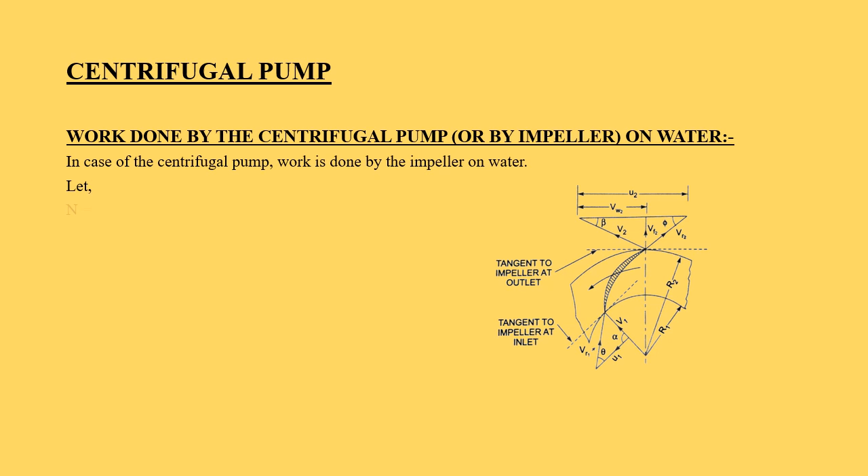In centrifugal pump, work is done by impeller on water. In the figure, N is the speed of impeller in RPM, and D1 is the diameter of impeller at inlet.

U1 is the tangential velocity of impeller at inlet, equal to pi D1 N by 60. D2 is the diameter of impeller at the outlet, and U2 is the tangential velocity of impeller at the outlet, equal to pi D2 N by 60.

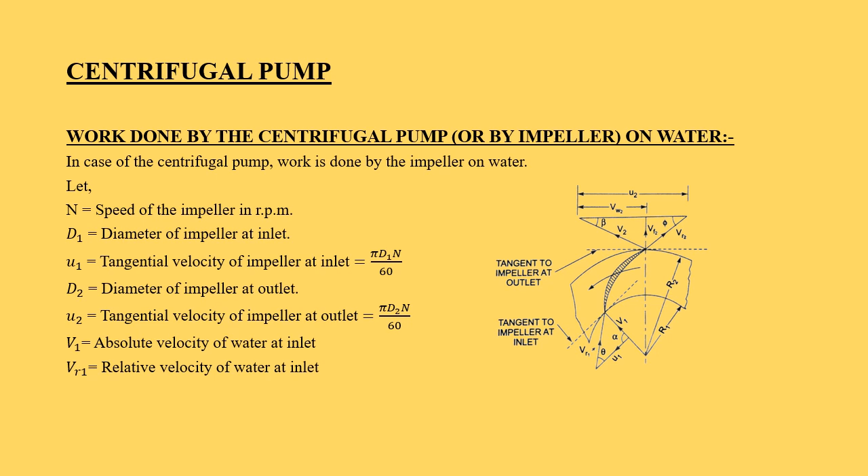V1 is the absolute velocity of water at inlet, and Vr1 is the relative velocity of water at inlet. Alpha is the angle made by V1 at inlet with the direction of motion of the vane, and theta is the angle made by Vr1 at inlet with the direction of motion of the vane. V2, Vr2, beta, phi are the corresponding values at the outlet.

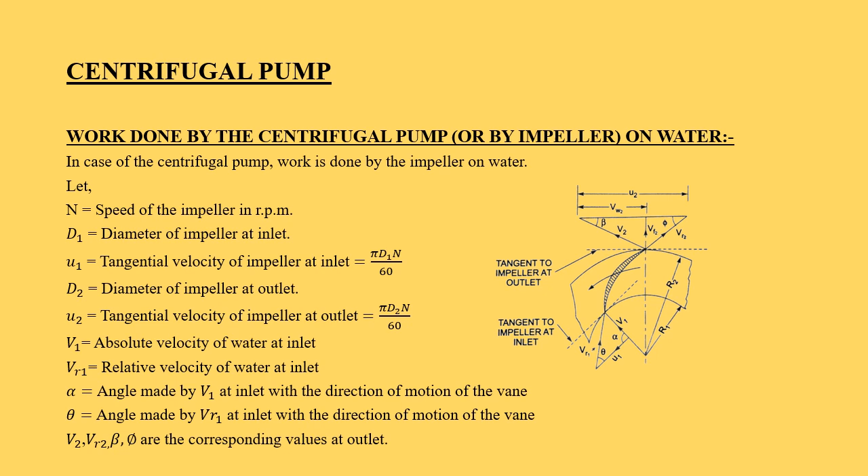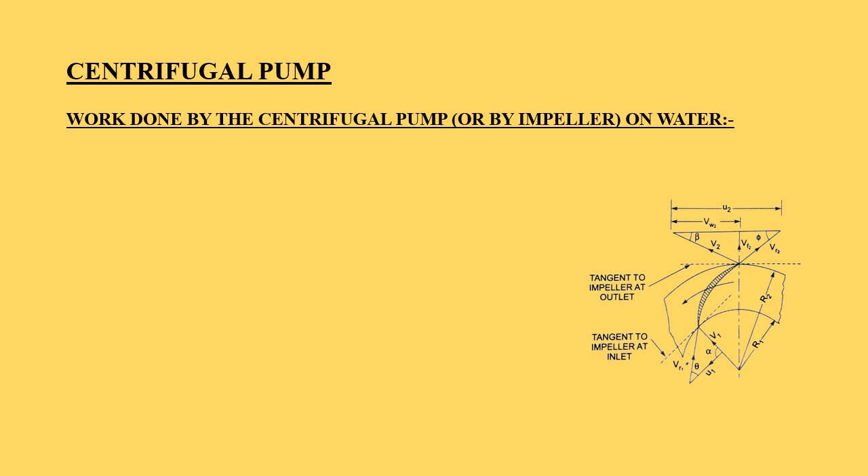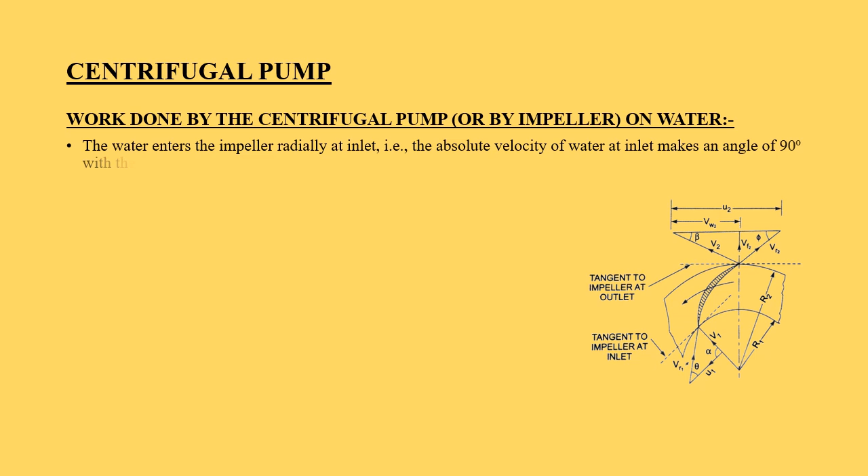In centrifugal pump, water enters the impeller radially at inlet. That is, the absolute velocity of water at the inlet makes an angle of 90 degrees with the direction of motion of the impeller.

The work done by the impeller on the water per second per unit weight of water striking per second is equal to minus the work done in case of a turbine. So we can write minus 1 by G Vw1 U1 minus Vw2 U2. By rewriting the equation, we get 1 by G Vw2 U2 minus Vw1 U1, which is equal to 1 by G Vw2 U2 since Vw1 is equal to 0.

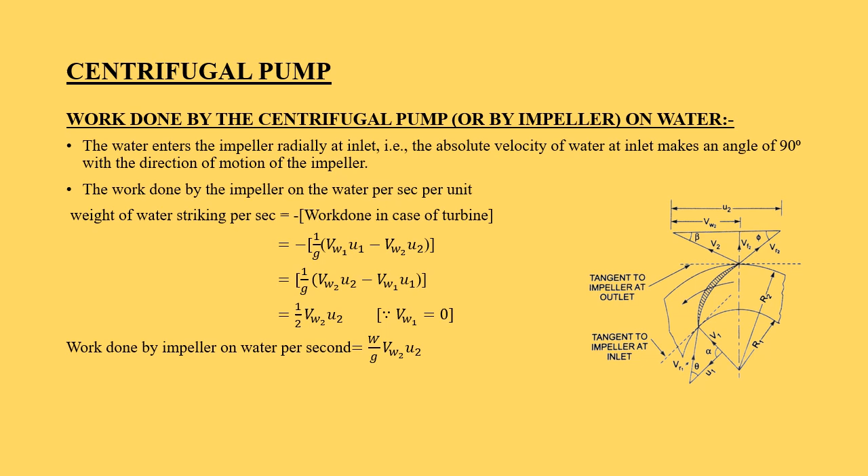Work done by the impeller on water per second is equal to W by G Vw2 into U2, where W is the weight of water, equal to rho G into Q, where Q is the volume of water, which is equal to area into velocity of flow. So instead of area, we can write pi D1 b1, and instead of velocity of flow, we can write Vf1.

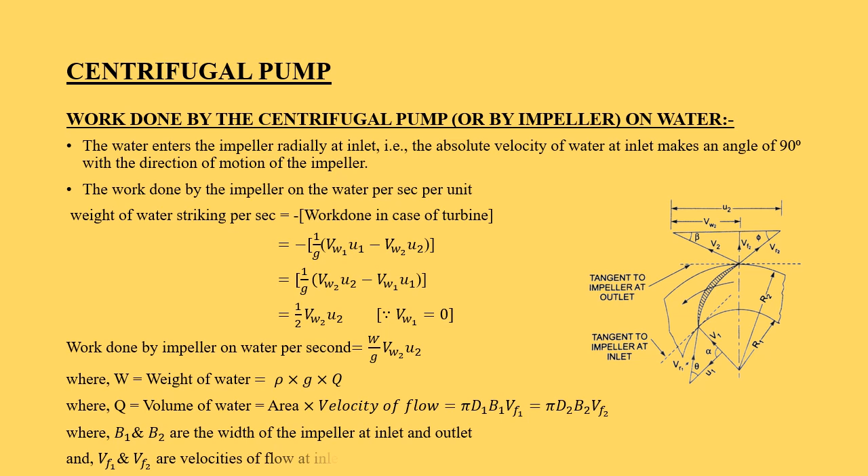So the equation becomes pi D1 b1 into Vf1, which is equal to pi D2 b2 into Vf2, where b1 and b2 are the width of impeller at inlet and outlet, and Vf1 and Vf2 are the velocities of flow at inlet and outlet.

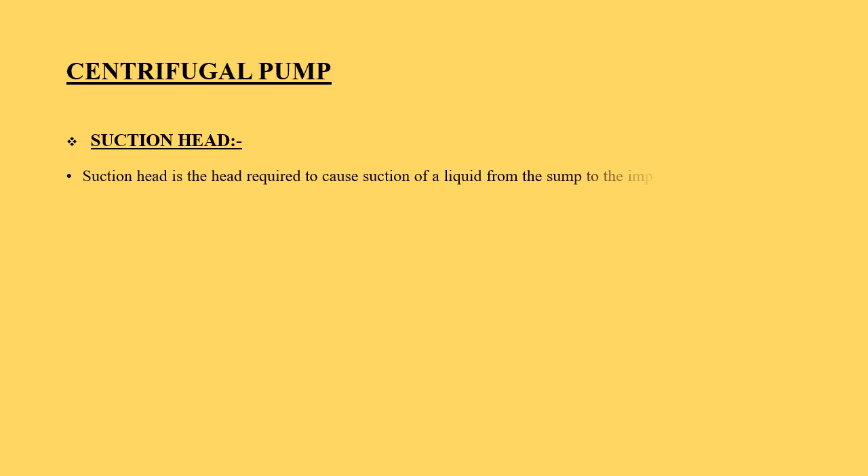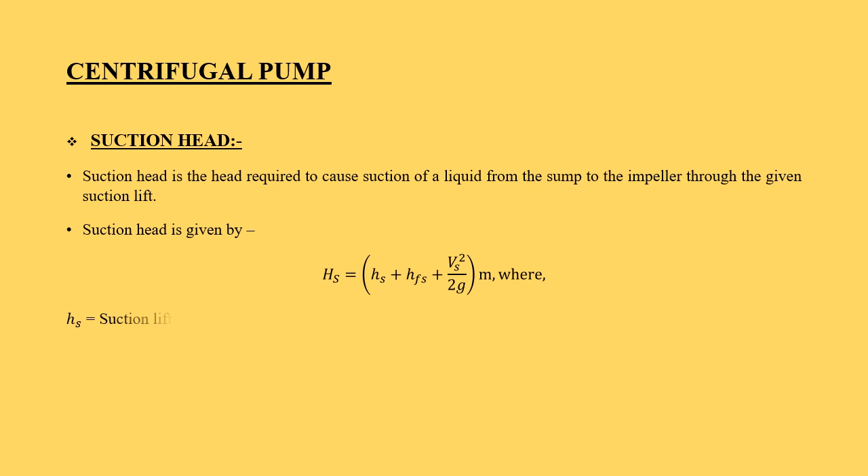Suction head of a centrifugal pump is the head required to cause the suction of a liquid from the sump to the impeller through a given suction lift. Suction head is given by capital Hs, equal to small hs plus small hfs plus Vs square by 2g meter, where small hs is the suction lift in meter, and small hfs is the head lost in friction in the suction pipe in meter.

Vs is the velocity of flow in meter per second through the suction pipe, and Vs square by 2g is the kinetic head in the suction pipe required to cause the flow through the suction pipe.

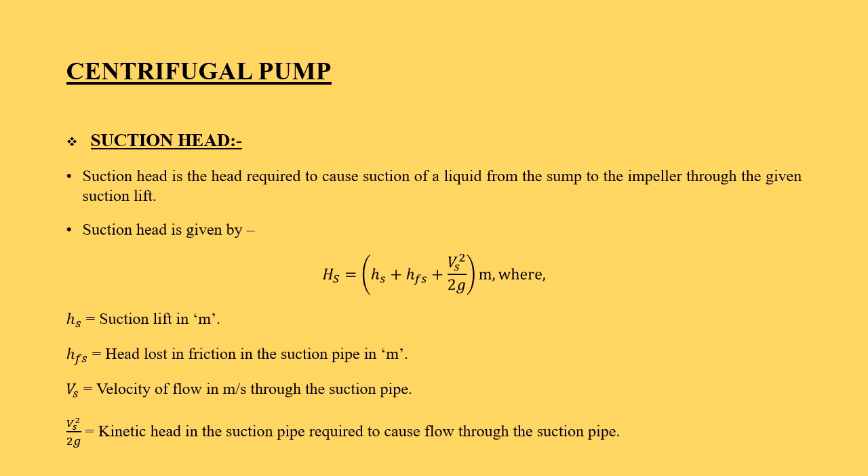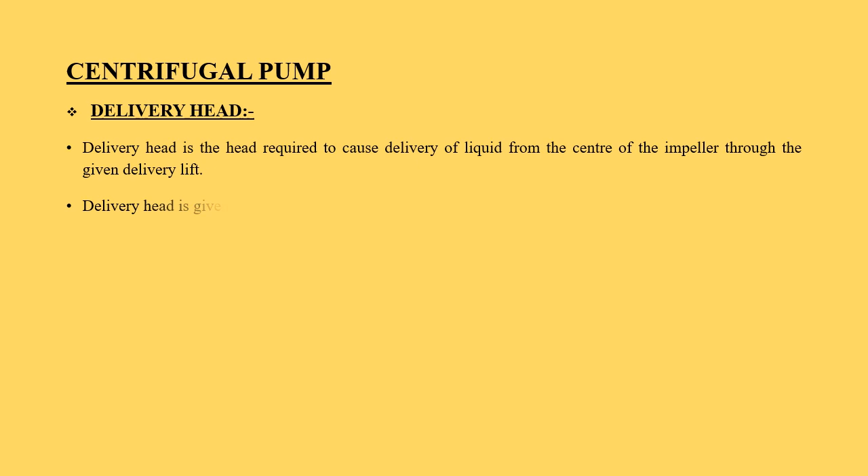Delivery head is the head required to cause the delivery of liquid from the center of the impeller through a given delivery lift. Delivery head is given by capital HD, equal to small hd plus small hfd

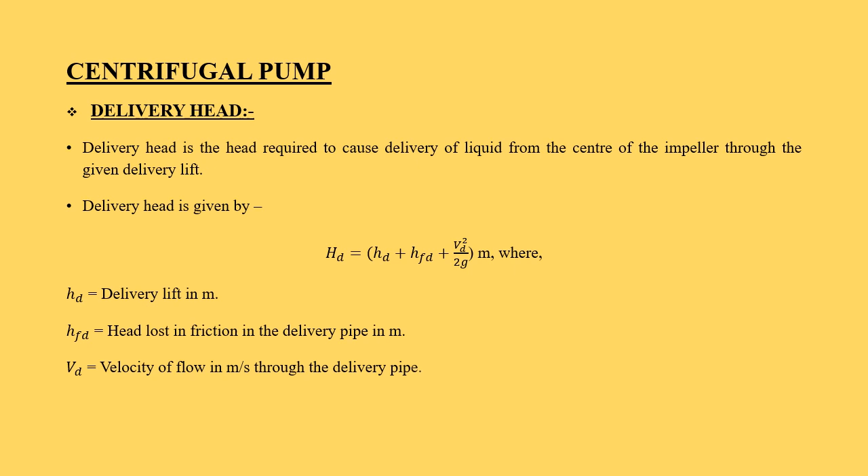plus Vd square by 2g meter, where small hd is the delivery lift in meter, small hfd is the head lost in friction in the delivery pipe in meter, Vd is the velocity of flow in meter per second through the delivery pipe, and Vd square by 2g is the kinetic head in the delivery pipe required to cause the flow through the delivery pipe.

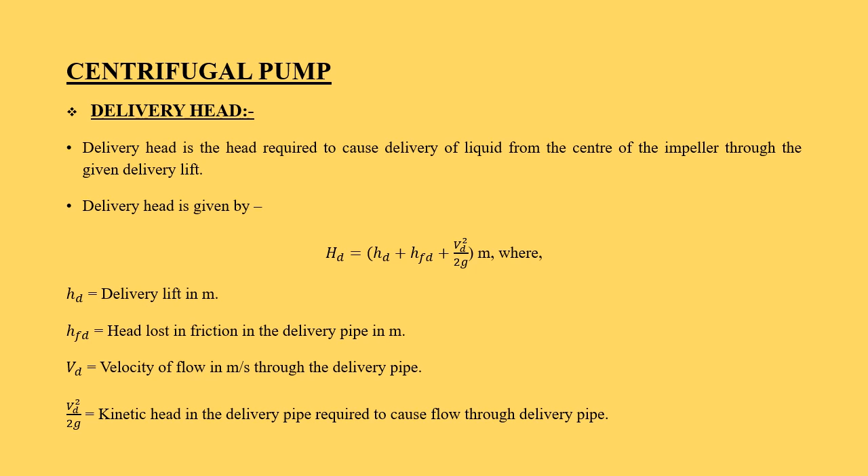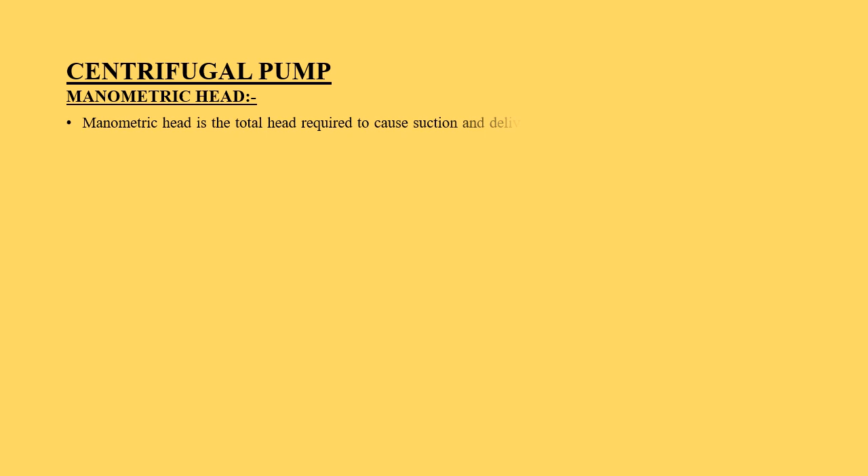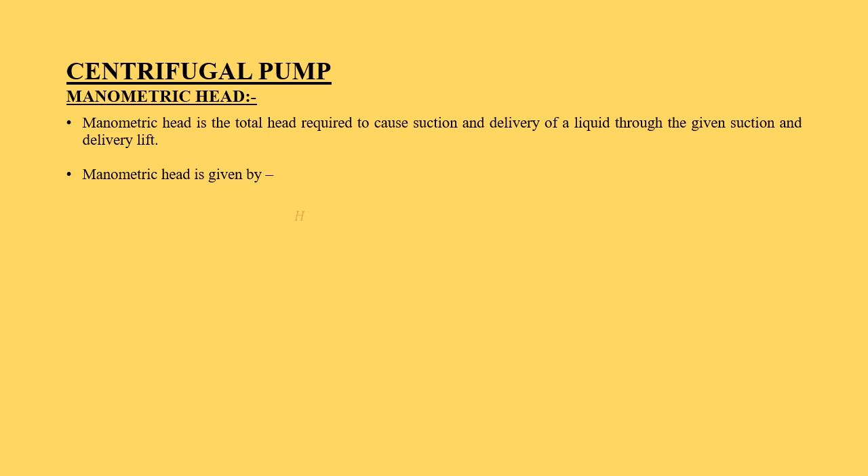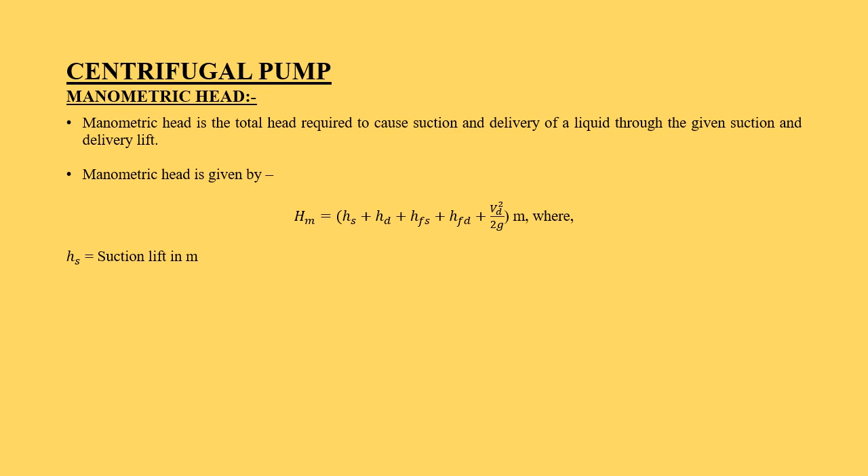Manometric head is the total head required to cause the suction and delivery of liquid through the given suction and delivery lift. Thus, the manometric head is given by capital HM, equal to small hs plus small hd plus small hfs plus small hfd plus Vd square by 2g meter, where small hs is the suction lift in meter, small hd is the delivery lift in meter, and small hfs is the head lost in friction in the suction pipe in meter.

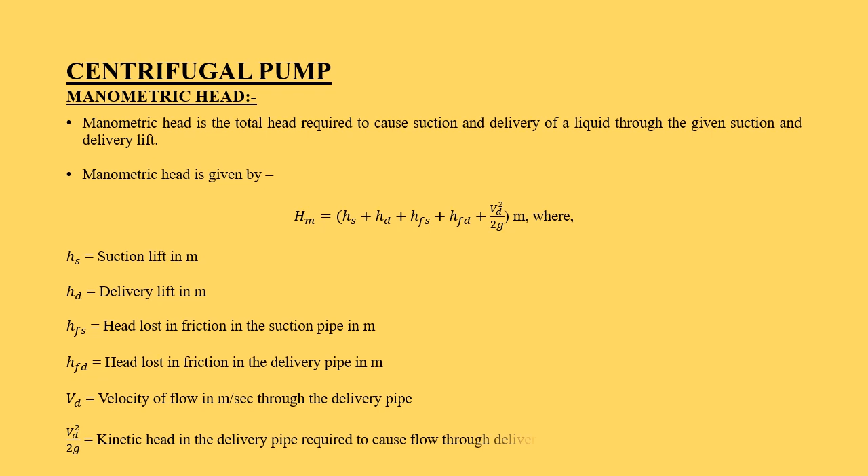Small hfd is the head lost in friction in the delivery pipe in meter. Vd is the velocity of flow in meter per second through the delivery pipe, and Vd square by 2g is the kinetic head in the delivery pipe required to cause the flow through the delivery pipe.

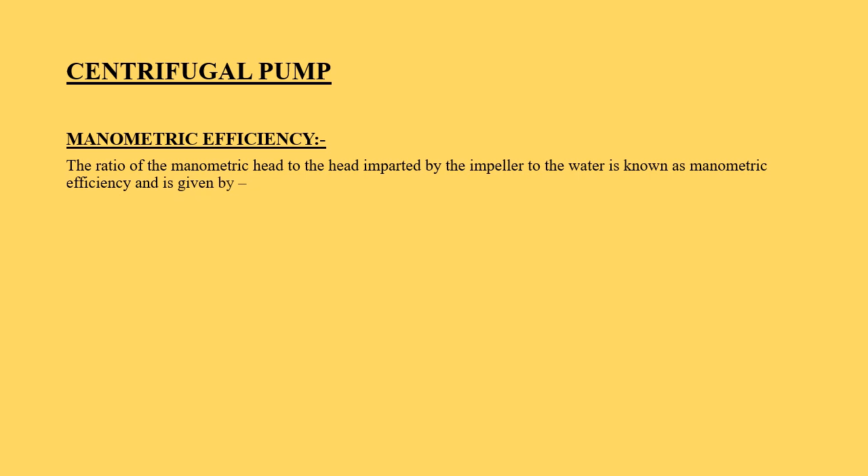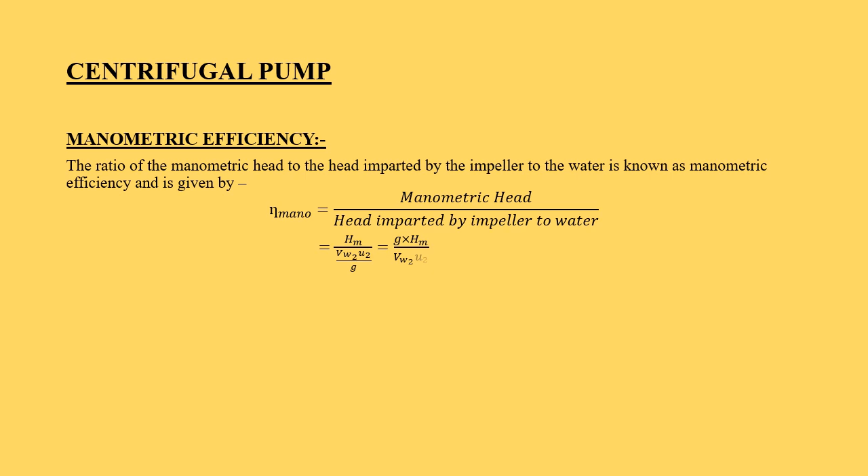Manometric efficiency of a centrifugal pump is the ratio of manometric head to the head imparted by the impeller to the water. It is given by eta mano equals manometric head divided by head imparted by impeller to water. Instead of manometric head we write Hm, and head imparted by impeller to water is Vw2 U2 by G, so eta mano equals G into Hm divided by Vw2 U2, where Vw2 is the velocity of whirl at the outlet in meter per second.

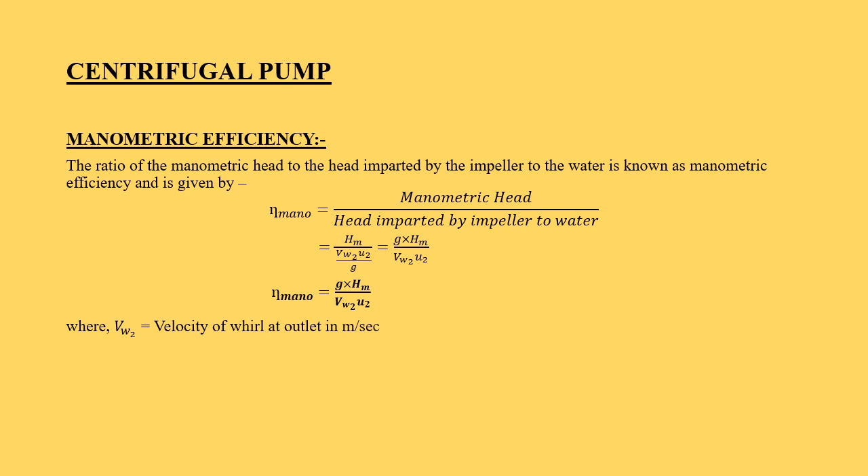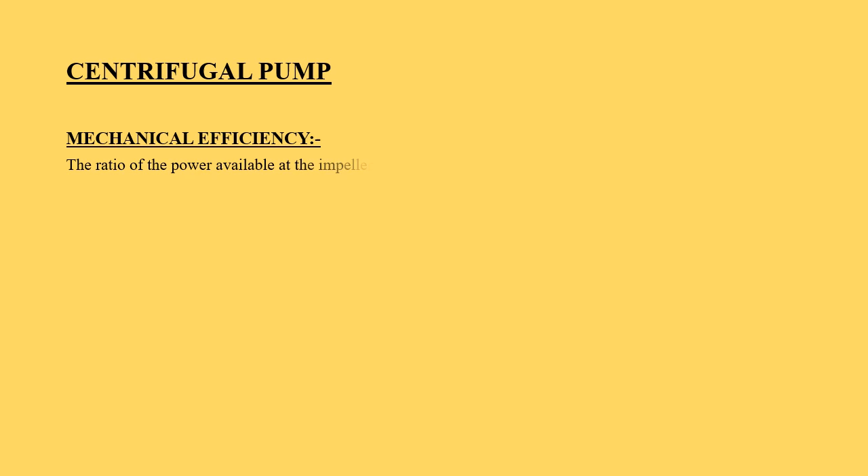Mechanical efficiency of a centrifugal pump is the ratio of the power available at the impeller to the power at the shaft of the pump.

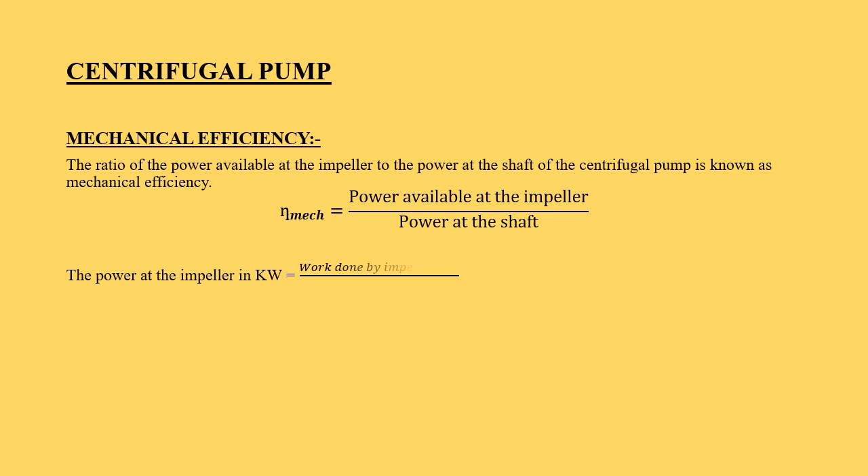The mechanical efficiency, denoted by eta mech, is equal to power available at the impeller divided by power at the shaft. The power at the impeller in kilowatt equals work done by impeller per second divided by 1000. Since work done by impeller per second equals W by G into Vw2 into U2, the power at the impeller in kilowatt becomes W by G into Vw2 into U2 divided by 1000. So eta mech becomes W by G into Vw2 into U2 divided by 1000, divided by shaft power.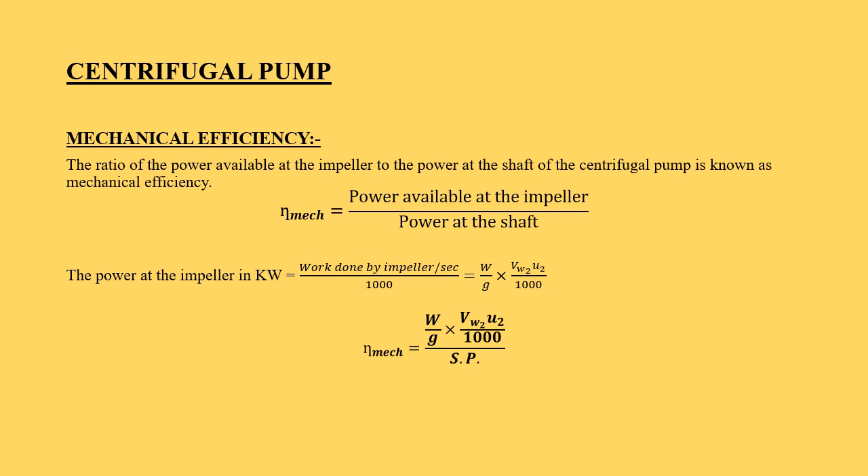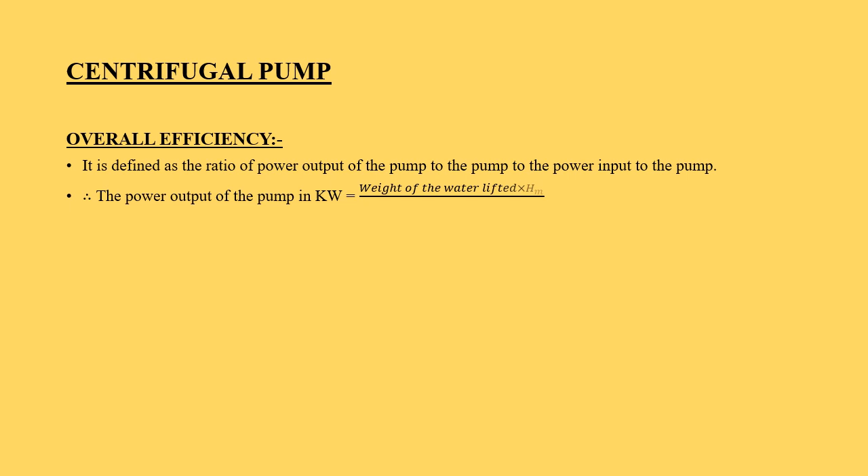Overall efficiency of a centrifugal pump is the ratio of power output of the pump to the power input to the pump. The power output of the pump in kilowatt equals weight of the water lifted into Hm divided by 1000.

Weight of water lifted is W into Hm by 1000, and the power input to the pump is equal to power supplied by the electric motor, which is the shaft power of the pump. So the overall efficiency, denoted by eta O, becomes W into Hm by 1000 divided by shaft power.

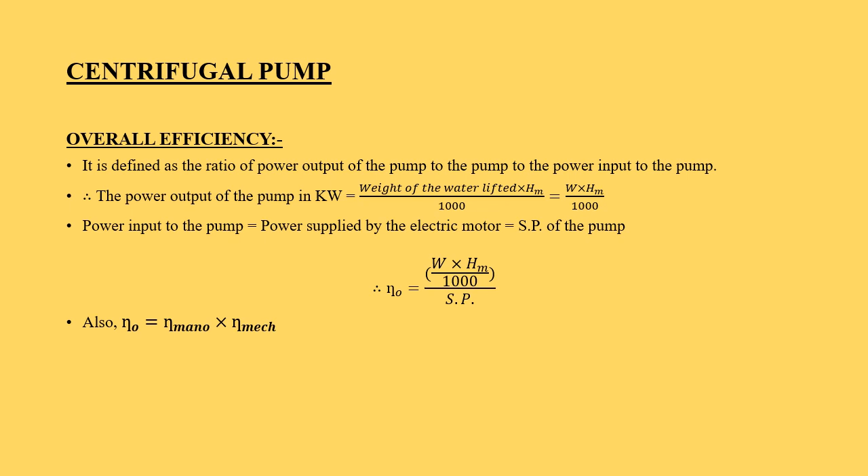Also, overall efficiency is equal to eta mano into eta mech. That is, the overall efficiency is equal to manometric efficiency into mechanical efficiency.

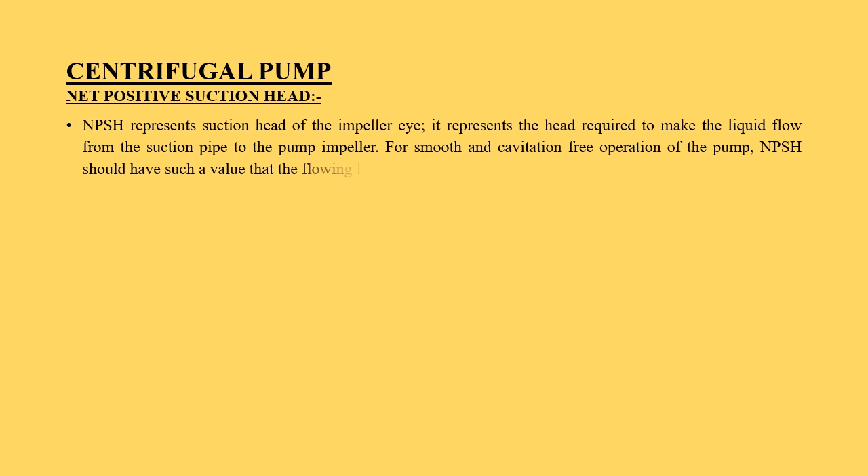The net positive suction head, in short NPSH, represents the suction head of the impeller. Actually, the net positive suction head is the head required to make the liquid flow from the suction pipe to the pump impeller. For smooth and cavitation-free operation of the pump, NPSH should have such a value that the flowing liquid does not boil under the reduced pressure.

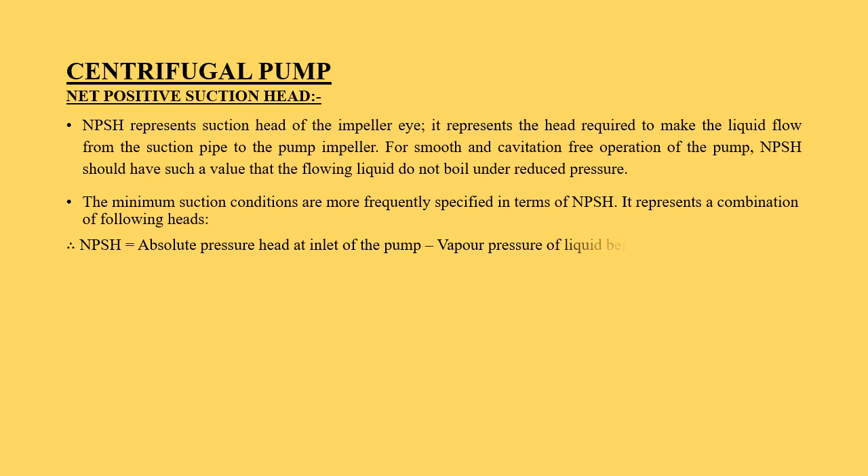The minimum suction conditions are more frequently specified in NPSH, and it represents a combination of various heads. NPSH equals absolute pressure head at inlet of the pump minus the vapor pressure of liquid being pumped, plus the velocity head in the suction pipe.

For absolute pressure head at inlet of pump we write PS by W, for vapor pressure of liquid being pumped PV by W, and for velocity head in the suction pipe VS square by 2G.

Rewriting the equation, PA by W minus VS square by 2G plus HS plus HFS for absolute pressure head at the inlet of the pump, minus PV by W plus VS square by 2G, where PA is the atmospheric pressure on the surface of the liquid in the suction well.

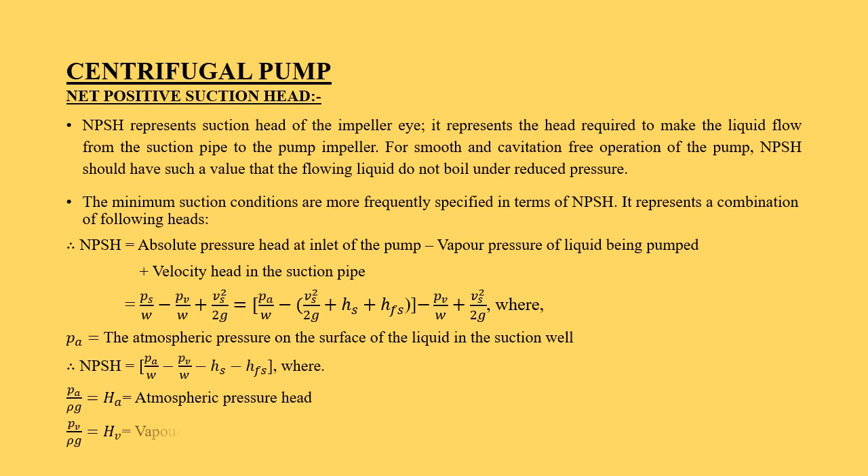So we can write that NPSH equals PA by W minus PV by W minus HS minus HFS, where PA by W or PA by rho g is equal to capital HA, the atmospheric pressure head, and PV by rho g is capital HV, the vapor pressure head.